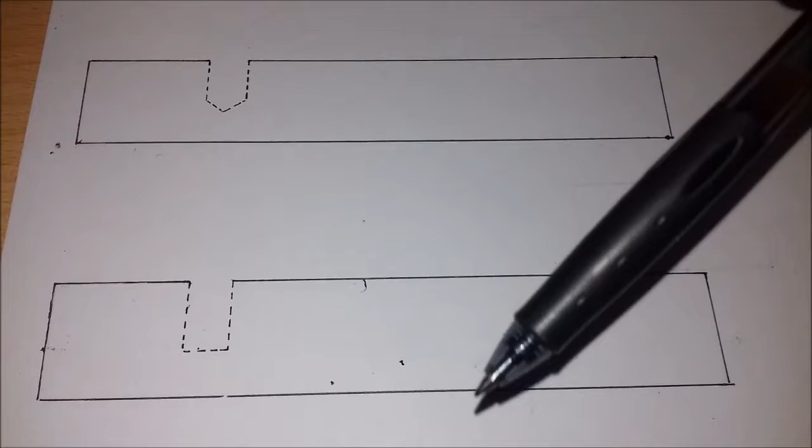Flat bottom, what's it all about? Take a look at this drawing and imagine these are two pieces of steel. When you drill to any depth, it leaves that telltale triangular shape cut.

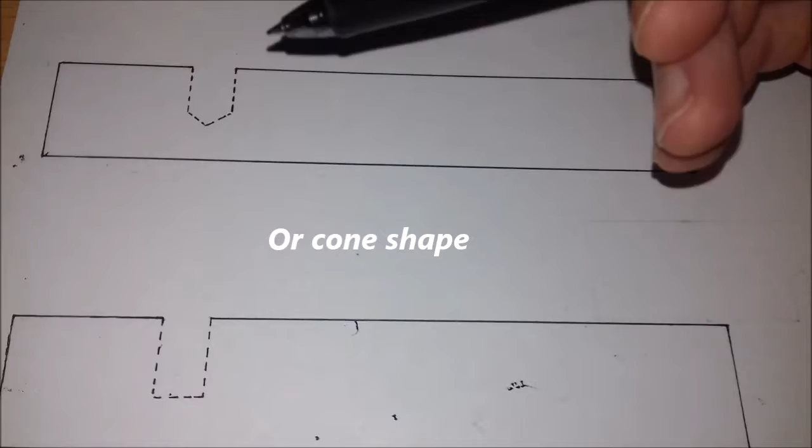If you've got something, say you're working to a drawing and they want you to make something with a cap screw that sits inside the job and have a flat bottom so it sits nice and securely,

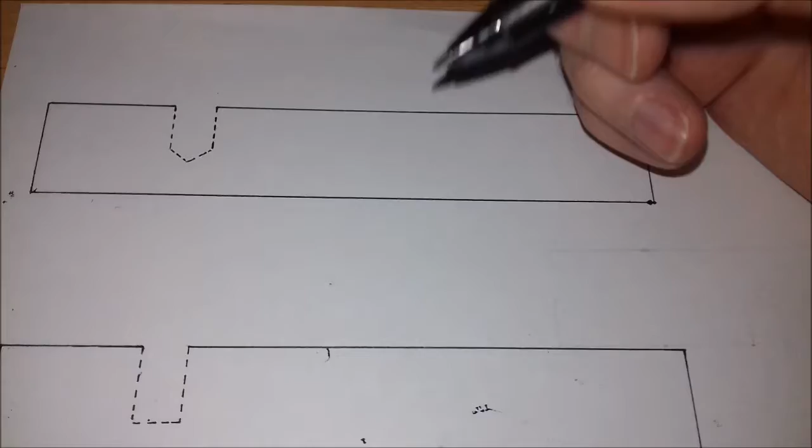say this is the top piece to something that the whole thing screws down on top of something. They just want things flush on the top. They want the screw to sit inside the metal and not on top of the piece or sticking out as we usually see, to sit flush just like that.

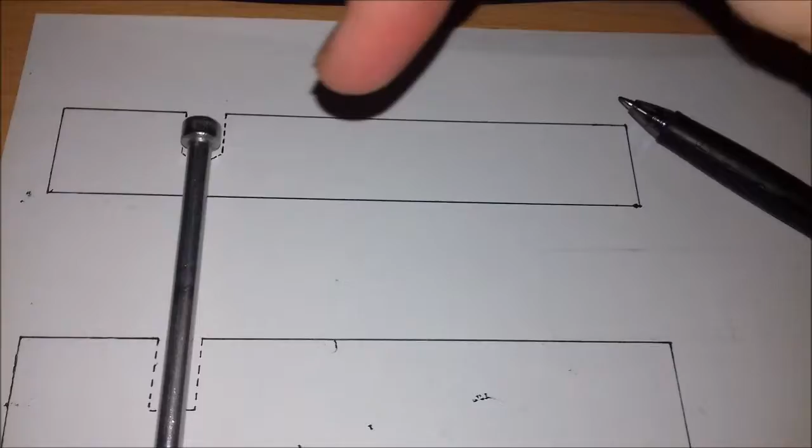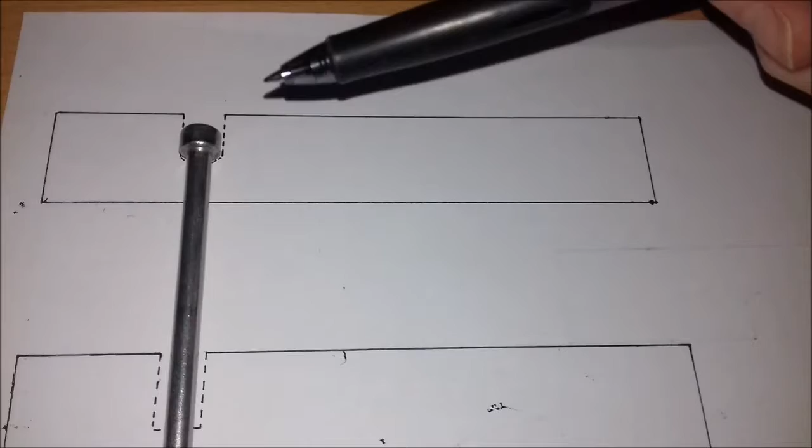You can see there he's sitting at the top, but in the top piece we've still got that triangular piece underneath. That won't hold it as securely as we'd like, so we would like to have a flat bottom for that head on that cap screw to rest.

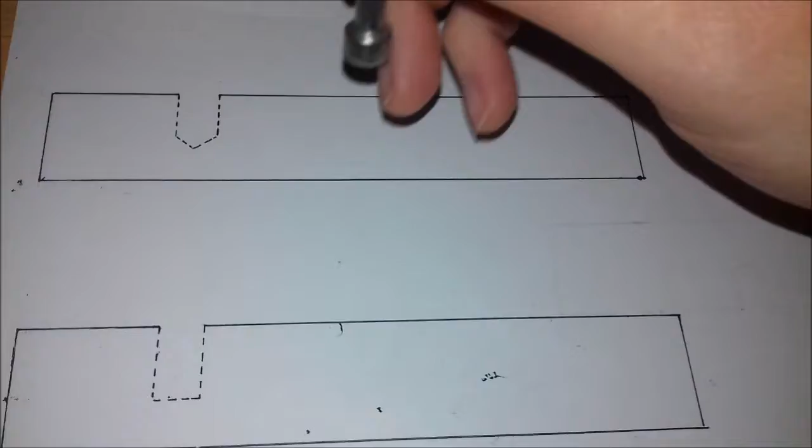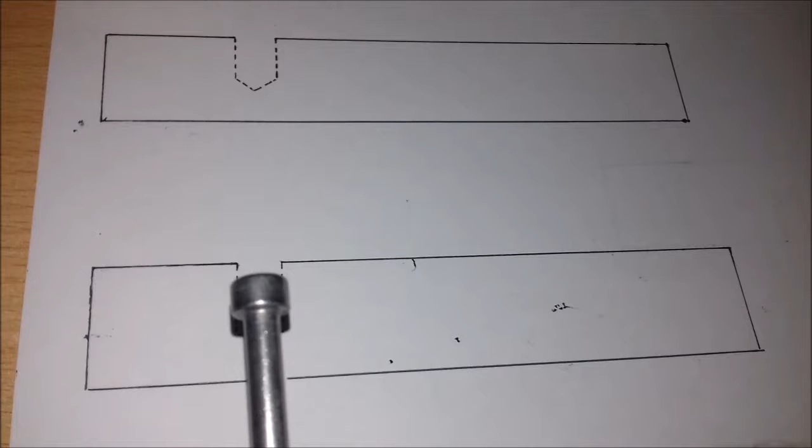As you can take a look at the cap screw, you can see how it's flat at the bottom, even though it is round. So if we take a look at the bottom piece of steel, we can see that we've actually got a flat bottom cut out of our hole, and it's not like the one at the top. And we can see that our cap screw head will fit nice and securely there against that.

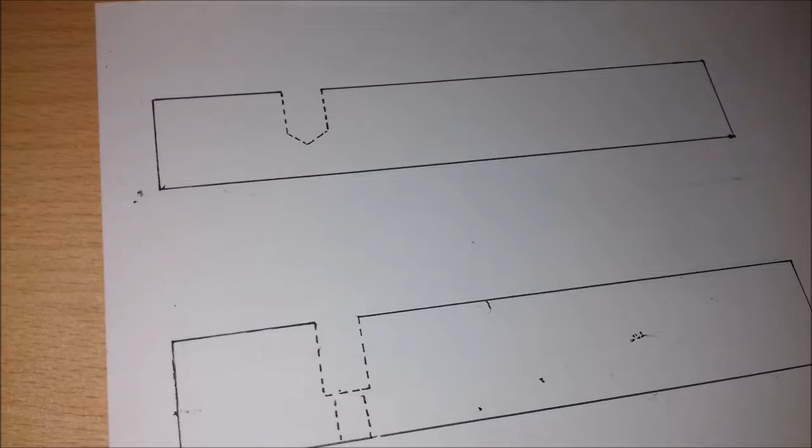And of course, in the real world, we would have our slightly smaller clearance hole drilled there for the shaft of the cap screw to go through, just like so. And it would be slightly smaller, so the cap screw head would still rest nice and snugly.

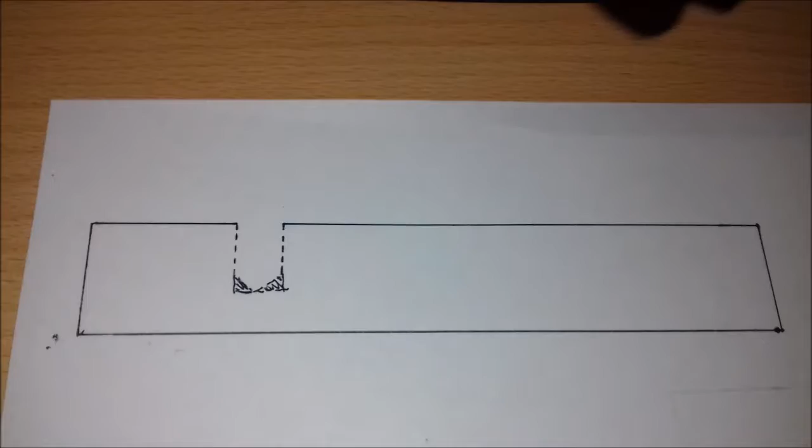What our drill having a flat bottom will essentially do is cut out the material here either side and clear that out from our original cut, what most drills leave, and essentially leave us with what we can see on the bottom job or the bottom drawing, a nice flat cut out. So it just removes that material there, just down at the bottom.

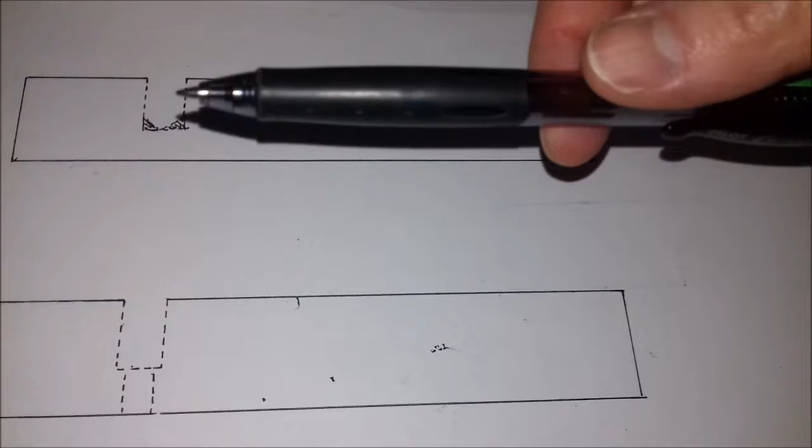You could call it, on this drawing, the two corner pieces, but obviously in reality, a hole is round and it goes through the piece cylindrically. So you have to keep that in mind.

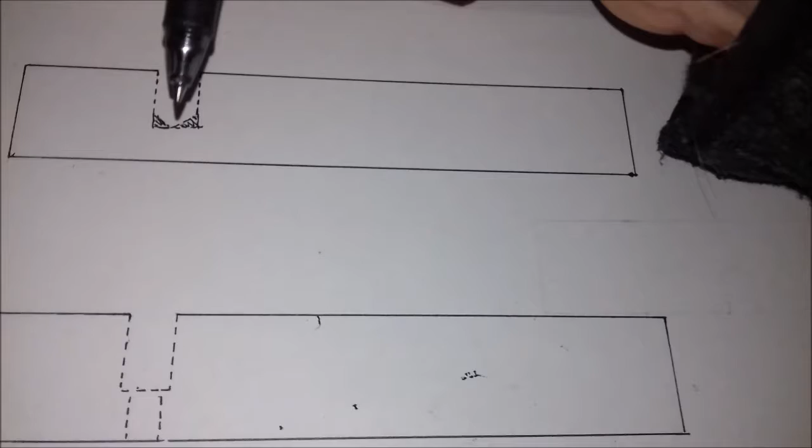Also, you will need an original drill in the same size diameter. So if you have broke one and you've sharpened it up like we're getting to here, you will still need to go out and buy a brand new one, because you will need to drill that pilot hole first before you can send the flat bottom down to create that flat bottom.

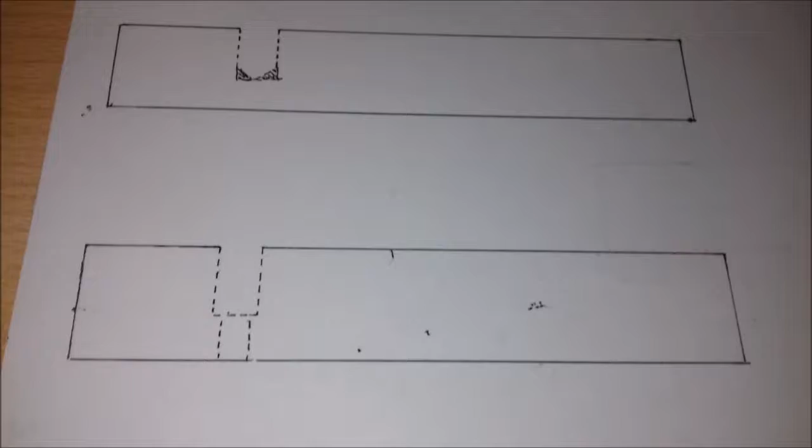And also, I will state that all drills, even the flat bottom, will follow the predetermined path of a hole that's already been drilled. So if you've got a hole that's already been drilled like we have here, the flat bottom will follow it straight down its path. You can try to get it as centered as you can.

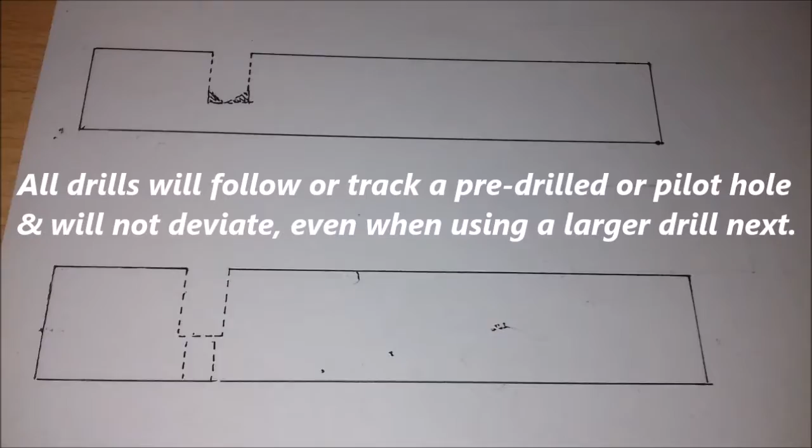In a pedestal drill, there are center guides to help you find the center, and you can take those out and put a drill in. It's a little bit like a center punch, really, with a cone on the end of it, and it'll just sit in the hole, and you'll get that centered, and then you can take that out and put a drill in.

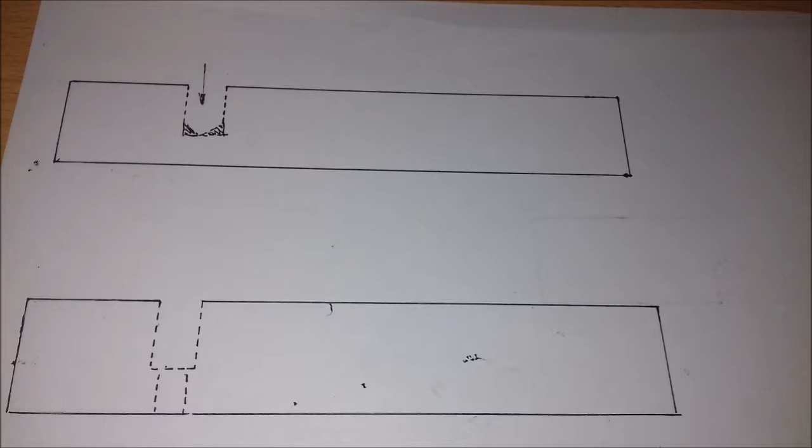But obviously, if you're using a hand drill and things like that, you have to keep in mind that you need to get it as centered as you can. But as long as the hole's been pilot drilled first, all drills, as long as you get it as centered as you can and not too far over, will follow that hole straight away. They'll be guided by that pre-cut hole or pilot hole.

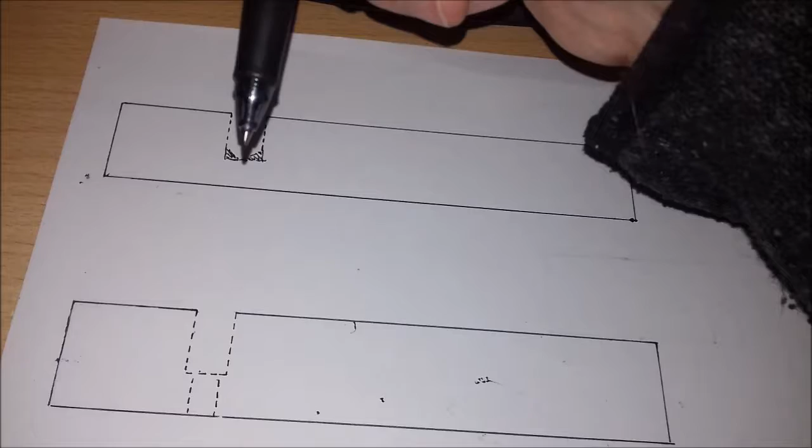They will flex a little and travel straight down the hole, but obviously if you bend the drill too much you will break it again, so that's why you need to be as centered as you possibly can get it.

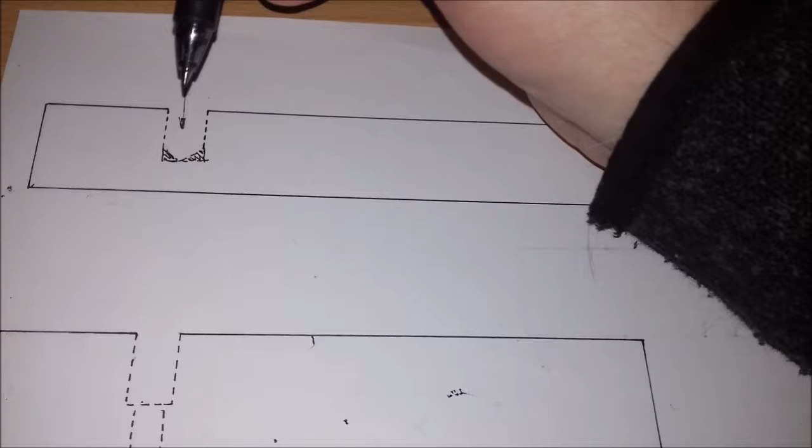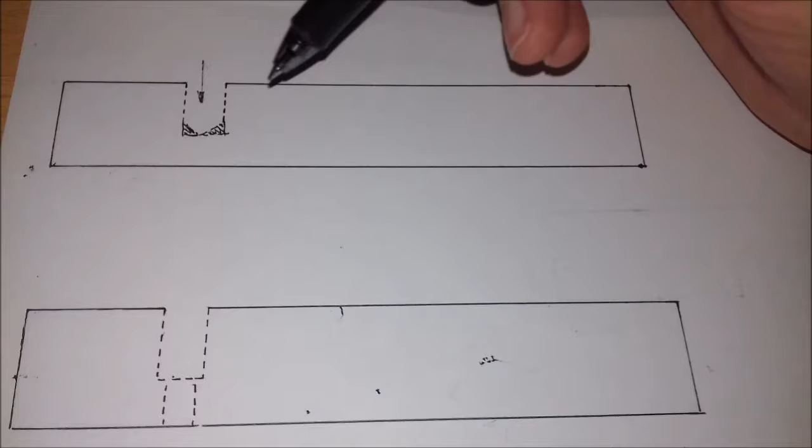It is also possible, but I wouldn't recommend it. I'd stick to using the same diameter drill that you bore the hole with and the same flat bottom afterwards. But it is possible. You can imagine a scenario where you need to drill a 6mm hole, and you've just broke your 6mm drill, so you've flat bottomed it on the grinder. If you're an engineer or a machinist, you likely have lots of different types of drills like that with

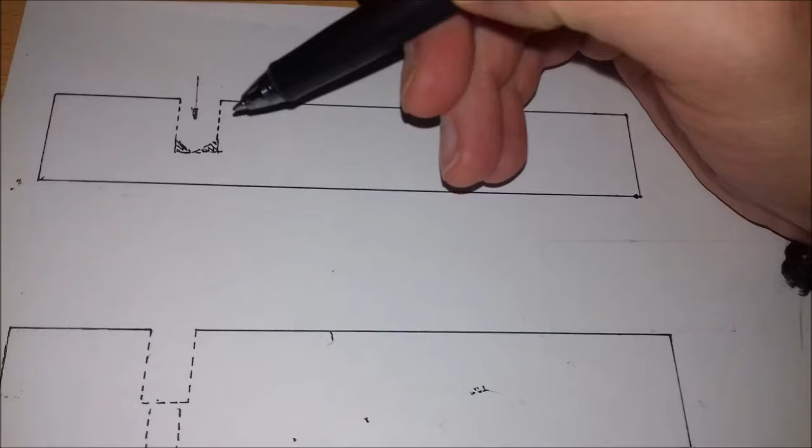offsets. Something like a 5.8 or a 5.9, and you could probably drill through to the depth that you were going, and then use the one that you've just broke, the 6mm that you flat bottomed, and that slight material either side, it'll follow the track of the hole that's already been cut, and it may take that material out all the way down or all the way through the piece, and you might get away with that, but I wouldn't particularly do that.

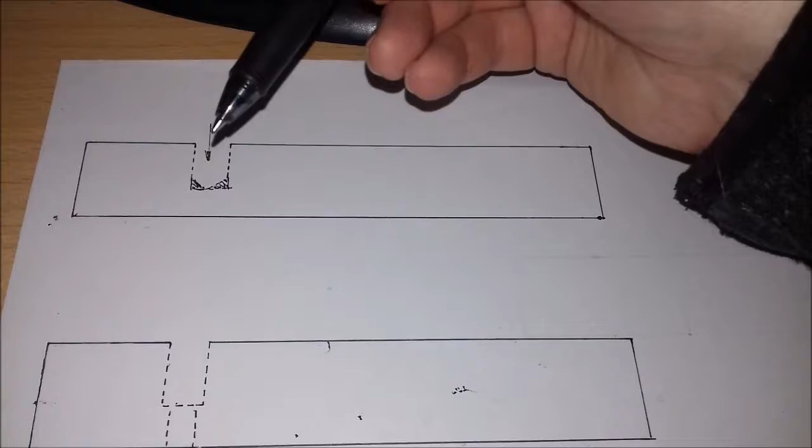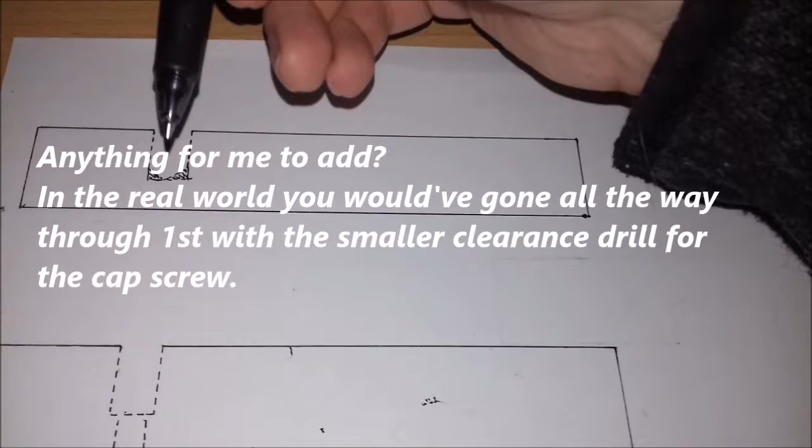Obviously we're talking about stopping part way through the piece and creating a flat bottom. That's just a little bit extra. Yeah, that's just basically it. You go down first with the same size diameter, your regular drill, drill the hole, swap the drills, put your flat bottom drill in, and then go back down to that depth and remove the material.

Okay, so going about creating our flat bottom drill, we can see here we've got a number 6, I think it is. We've got our broken drill. You can see the head there, it's sheared off, and I kept that lying around in front of the grinder for a little while, knowing that I can make a flat bottom out of it when I get around to actually doing it.

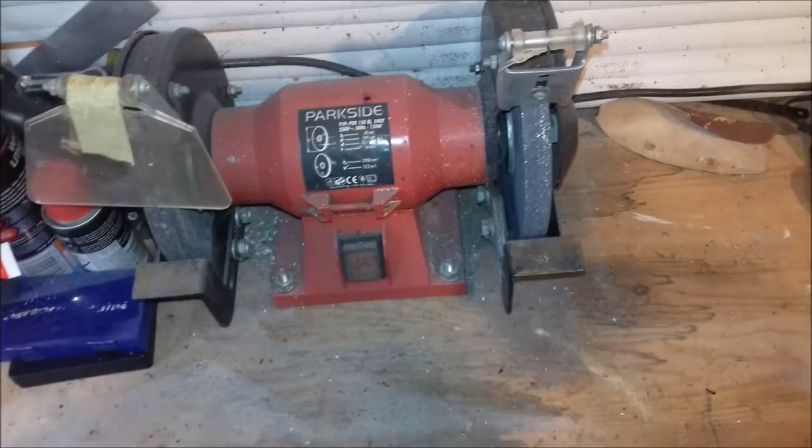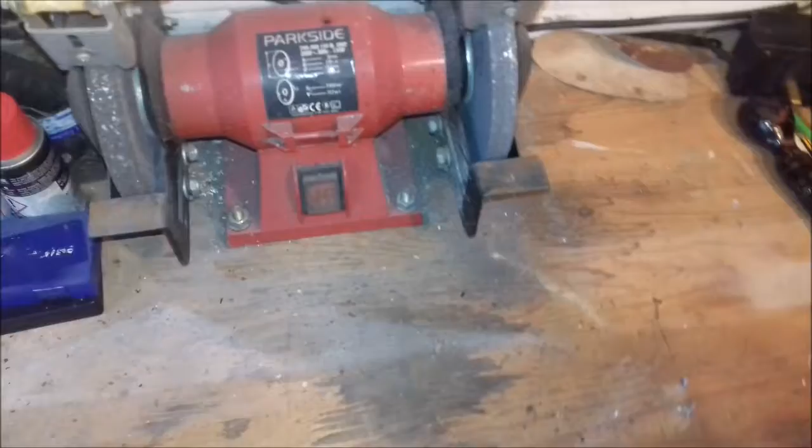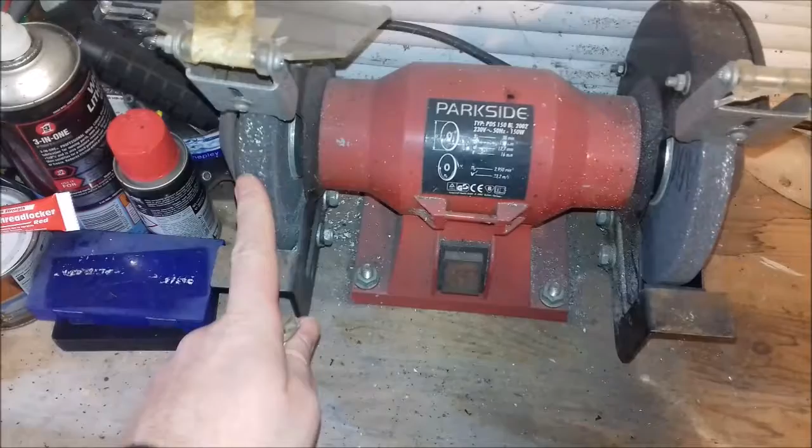Now we're using a mini home bench grinder, and these little fold down safety window things are never much good on them. They always tend to break from the vibrations, so they've got to be epoxied back on. But always make sure you've got your safety glasses. You should always wear your safety glasses anyway, regardless of those little silly windows, so I'll just flick them out of the way. Now on most grinders you'll have a coarse wheel and a fine wheel that we've got here on the left.

Some though will have one particular wheel, one or the other, and might have a linisher, which is like a belt sander for metal, on the other side. If that's the case, you'll have to make do with whatever wheel you've got. Although it's possible you could polish up the end with the linishing belt as well. You could flat bottom the drill with a linishing belt.

So I move the flammable items out of the way, which is the 2 aerosol cans of oil and lithium grease. Clear anything else out of the way, any obstacles around it that might get jammed in the wheel. Now with these bench grinders, the wheels on them are very, very thin. They're very big in an engineering room on a pedestal grinder, but like I say, they're really very thin here, about the size of the impression I'm making with my fingers there.

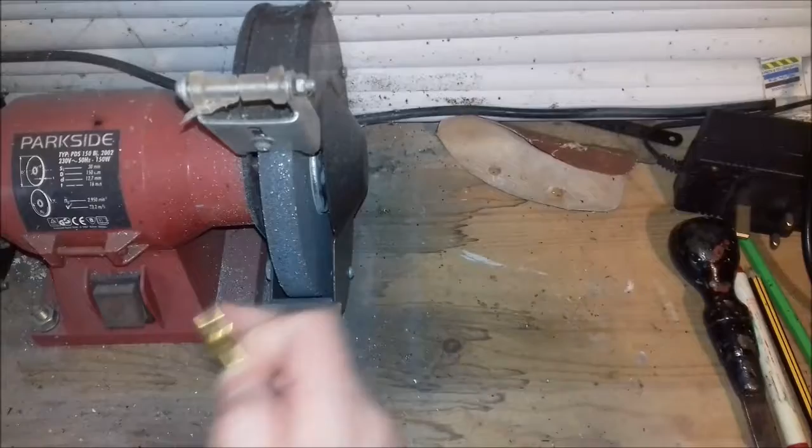And we're taught for health and safety reasons when it comes to hand grinding or bench grinding that we're not supposed to load the wheels from the side because they could explode or break. But obviously with a big bench grinder in an engineering workshop, they are really thick wheels, so that kind of helps when you're trying to get things flat. Don't forget it is a curved wheel, so you've got to be careful that you're not going to put a curve on the top. We want that to be flat.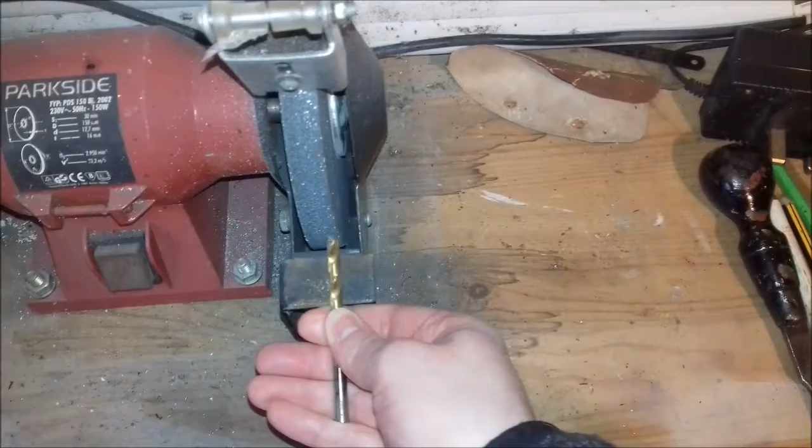So unfortunately, with a home grinder here, we're going to have to go against the grain with the finishing cut and load it from the side where it's flat. That's the only way we're going to be able to get a decent flat cut with this grinder, is to actually load the side a little. So we've got no choice about that, I'm afraid. But always make sure you've got your safety glasses on because of that.

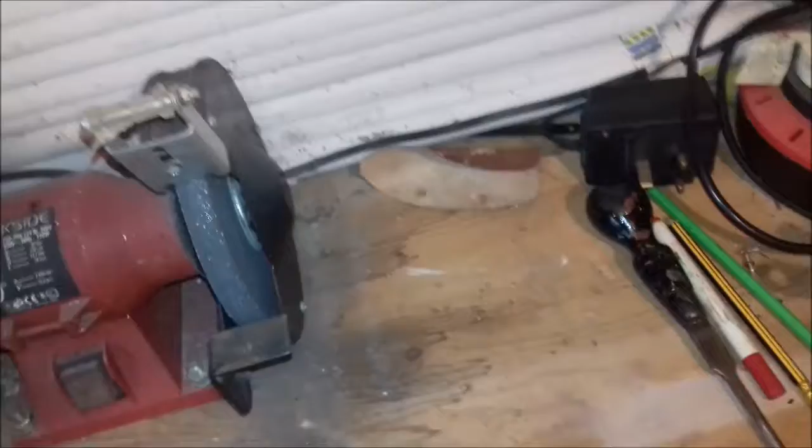So I know health and safety people out there and other engineers, especially the young kids just training, will say you're not supposed to do that. But we've got no choice in this matter. Now, usually in an engineering workshop you'll have a little bit of coolant, a little bit of suds or something in a jar or a little tub.

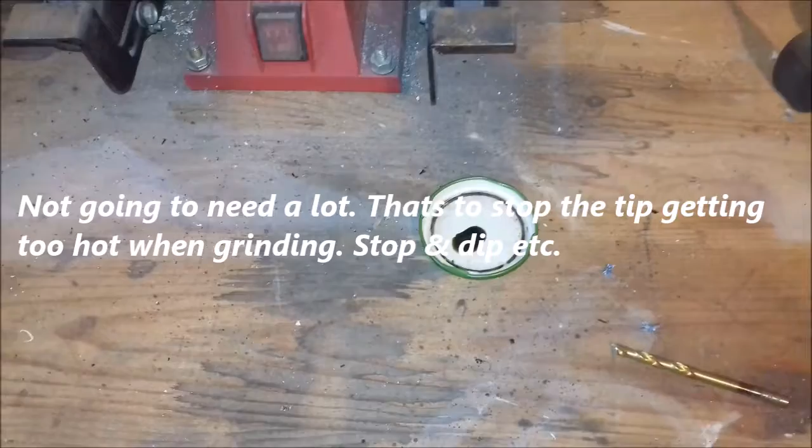To hand, I've got a little squirty tube of some oil, and I'll just put a blob on this lid, and I'll cool the tip of the drill down and just dip it in that oil to stop it from overheating as we grind the tip.

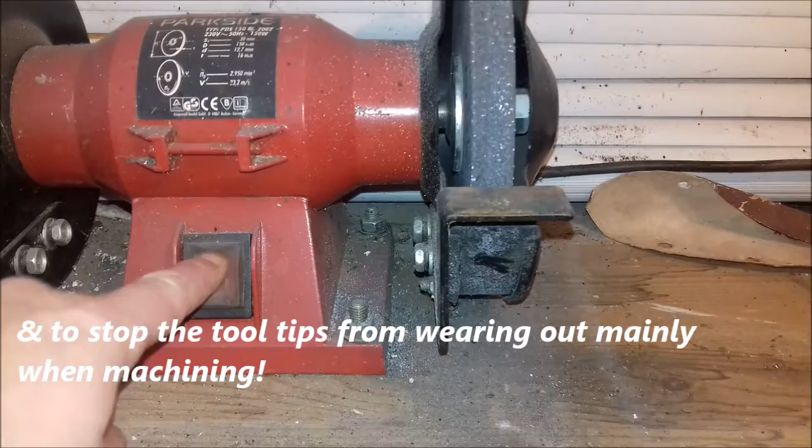Something like a little tub of oil should do you fine. I know most people haven't got proper suds. Suds, as we call it, is a gloopy, soapy substance that keeps the materials cool when we're machining and grinding. Usually when you're grinding you'll have a little tub there to dip your piece in, but I'm just going to use a little bit of oil just to cool the tip down. It's only a small little tip of a drill.

So actually I'll use the coarse wheel first, if you've got one, to grind the majority of that one side that's still sticking up where it snapped. So we'll go back and forth on the front of the drill, just to coarse it out and rough that out.

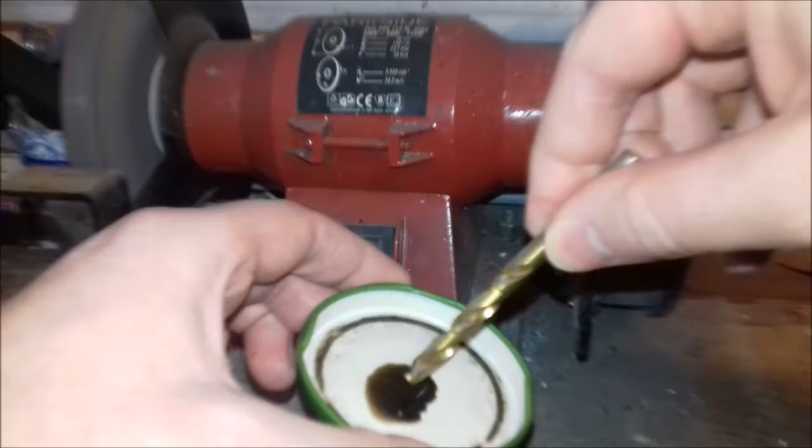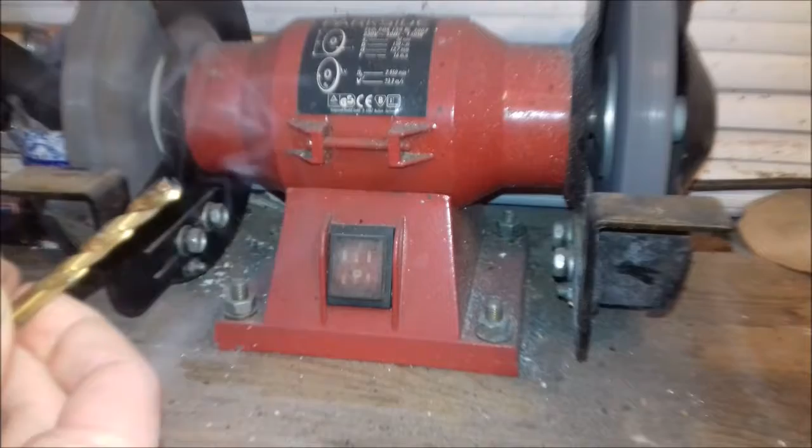Make sure you've got your safety glasses on, because those sparks are small fragments of steel coming off the drill bit, and they can lodge in your eye and you can go blind if you're not careful. So we cool the tip down, give it another go, inspect the tip, see if it's getting there, cool it down again.

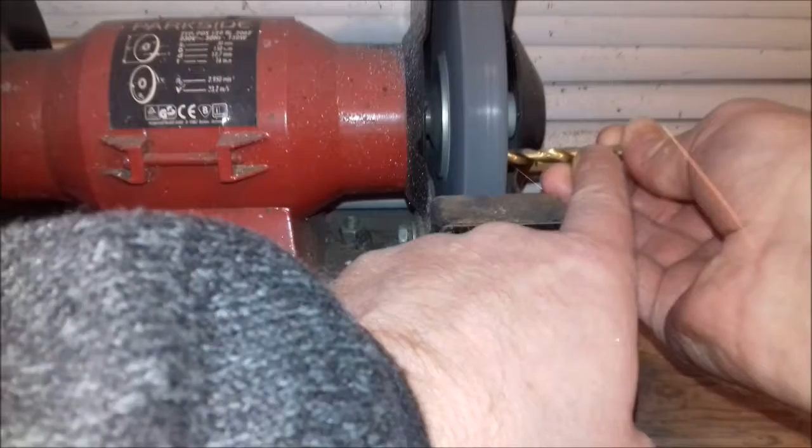So at this point I feel that the drill has been roughed out and it's time to put a much finer final cut on. And like I say, we are going to have to use the side of this wheel. I don't particularly like to do that, but we need to get it as flat as possible, and on this particular small grinder that is the best way we can do it, even though it's frowned upon. But it's the best way we're going to be able to do it here.

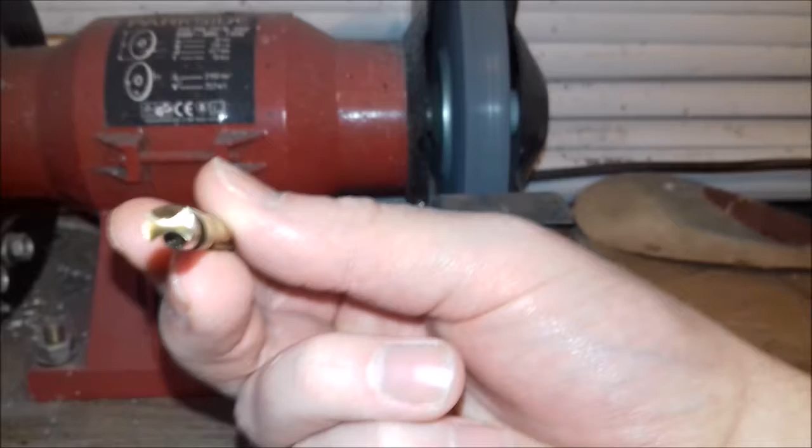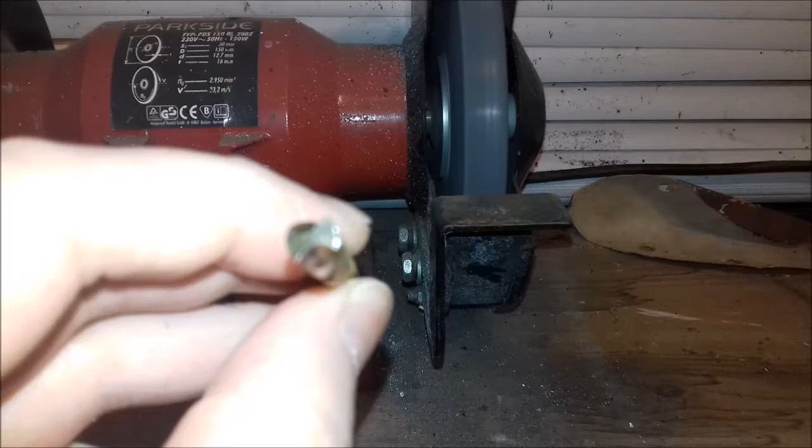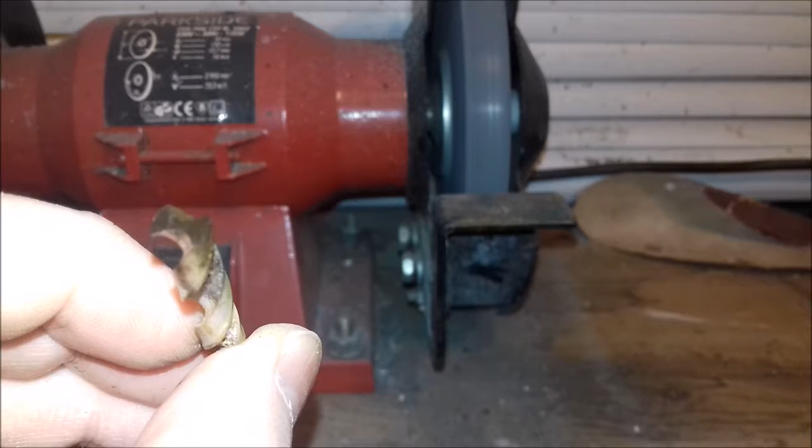So again, take another little look at it. All you want to do is get it as flat as you can, straight across the top. Check that yourself. I personally think that's fine now. I'll turn the grinder off. Always best to turn it off if you're not using it; you might turn around and catch yourself, forgetting you've left it on. Again, if you take a look there, you can see the kind of thing I'm talking about. Just straight flat across the top, as level as you can get it by eye.

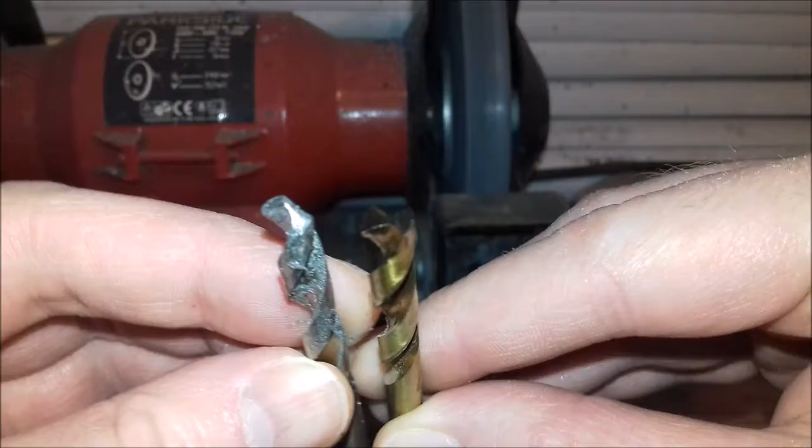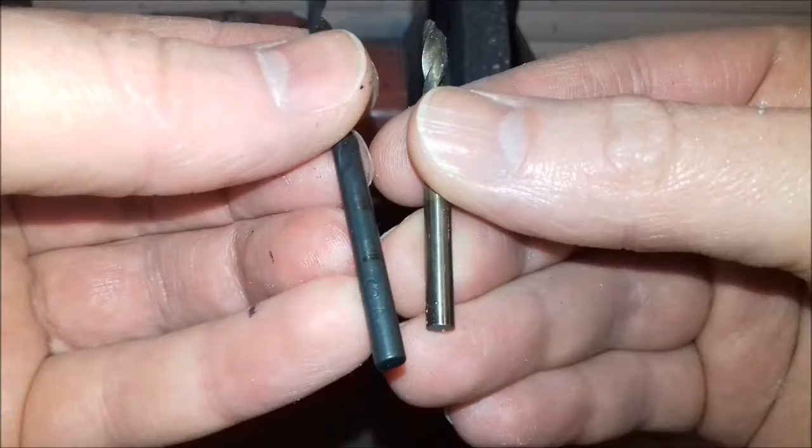So we'll just show a comparison with a drill that's exactly the same size but still intact: the tip on the regular drill compared to the flat bottom. And there we go, I also have a smaller one, I think it's a 4. Pick up two 4s there, and obviously one of them is fine and the other one is broken, so I can flat bottom that as well. So I'll just quickly do exactly the same thing with a smaller drill this time.

Obviously a smaller drill is a lot harder to do than a bigger drill, because it can move in your hands, it's more fiddly to hold, and you have to use your eyes on it a lot more. So we're just roughing it out again on the coarse wheel, and because we've got a fine wheel, we're going to do the finishing cut on the fine wheel. I just repositioned the camera there, it took a knock. Cool it down a bit, and put a finishing cut on that.

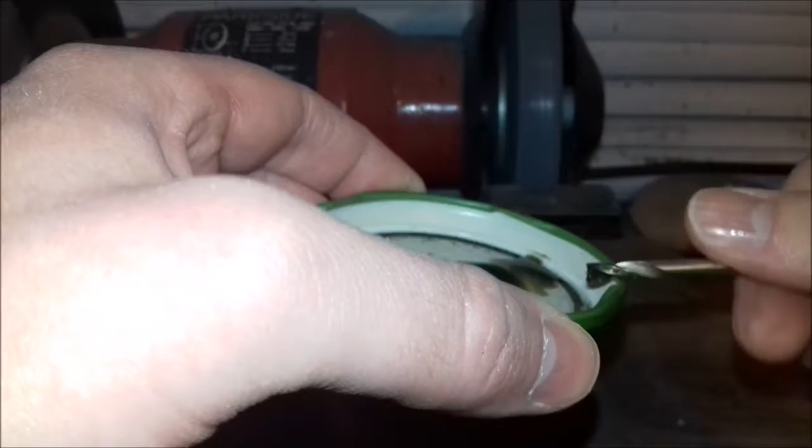And we'll take a look now, just a little nick, cool it down, just a bit of habit. It probably didn't need cooling down, it wasn't on for very long, but remember, you still have to hold the pieces that you're grinding. If they get too hot, they tend to burn your fingers. So that's something else you need to watch out for when grinding.

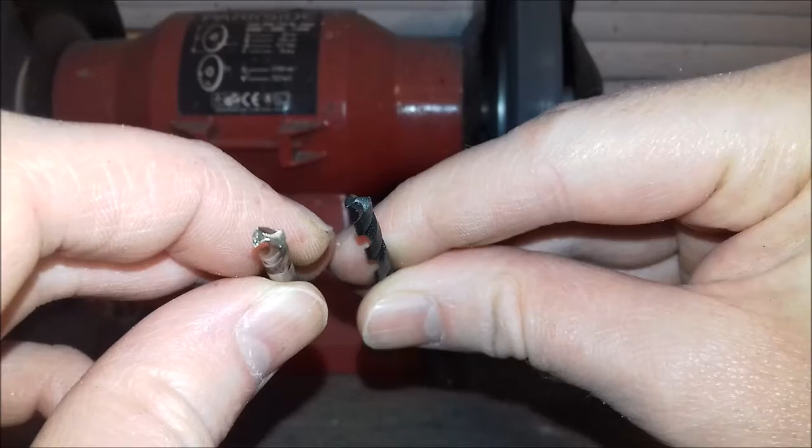Again, inspect the tip, this time on the 4mm, and hold it against the regular drill tip, just so you can see the difference, if you don't get it by now. That should be able to cut out your flat bottom. Remember, it depends where you break your drill. As long as you've still got some twist on there, you should be fine. But obviously it'll be a shorter drill if you've snapped it most of the way down.

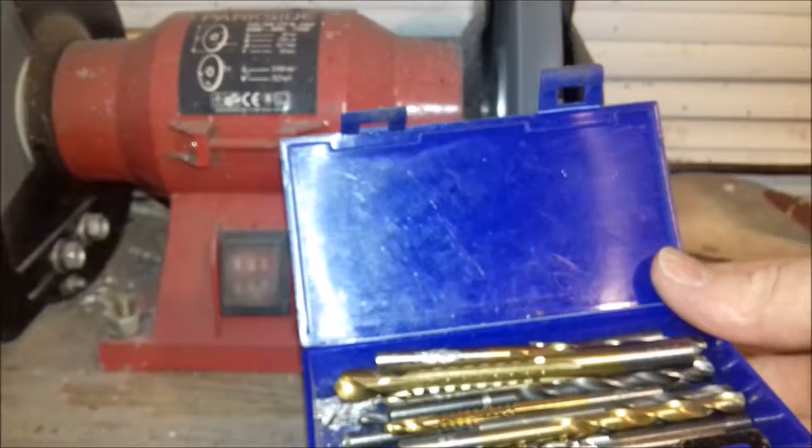This is my little box of weird and wonderful drill bits, my HSS drill bits and centre drills and things like that.